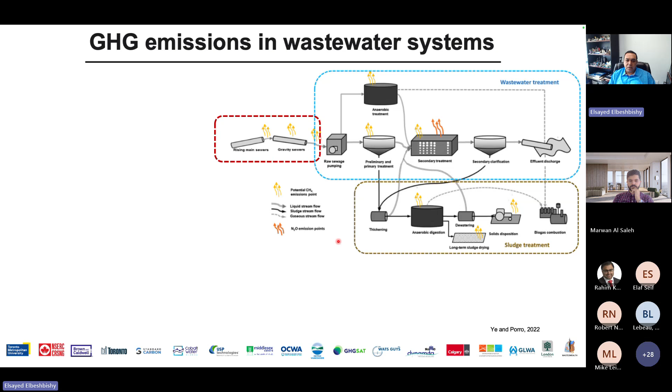In this project, we didn't focus on just one sector, but covered all of them, starting from the collection system. We are studying the greenhouse gas emissions from the collection system, from the mainstream wastewater treatment train, and from the sludge management part. So in general, we are focusing on the sewer network, wastewater treatment processes, and sludge management, and we are measuring both methane and nitrous oxide.

The main sources for methane emission, this is what we thought at the beginning when we initially put the research question together, were mainly the collection system, primary clarifiers, anaerobic digestion, and sludge storage. However, you're going to see today, based on our experience, there are some other sources that we didn't know about before. From this project we highlighted some of those methane emission sources that typically we don't consider.

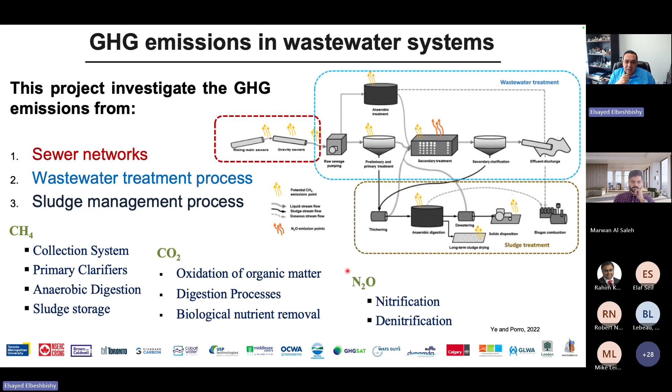Same thing for nitrous oxide. When we planned this project, we were focusing on wastewater treatment facilities implying nitrogen removal, with nitrification and denitrification processes, as the focus. We said, okay, what if we tested facilities that are not designed for nitrogen removal? What is going to happen? You will see some surprises today from this specific experience we had in this project.

So I will tell you what is the research question that we put at the beginning, and this is what we want to really understand at the end of this project. From the methane emission perspective, our target was to get to know what is the best sensing technique for methane emission measurements, because we have many sensing techniques or methods to monitor methane emission. So which one is better to use? Is it the ground sensing or the aerial sensing, or what?

And if we applied multiple sensors or different sensing methods—what we call multi-level, from the ground sensor to the aerial sensor, even using computer simulation—can we try to get a correlation between those sensing methods? That was another thing: can we use one to replace another? And what is the best method for detecting methane emission on wastewater, specifically on wastewater treatment plants?

And same thing, as you know, if we know the methane emission and we know the sources, we can mitigate that and we can reduce the emission. That's from the engineering perspective, I would say—sorry to say that, but I'd say it's the easy part.

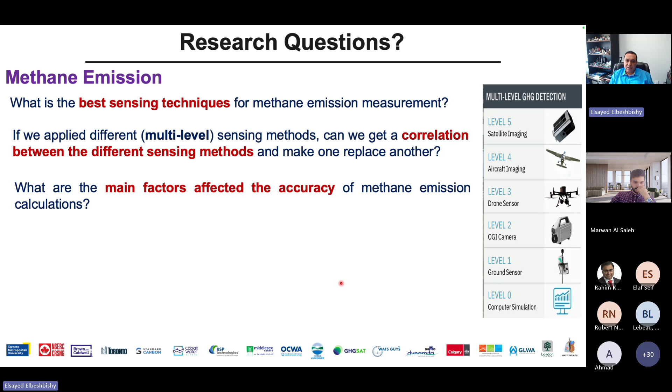So what are the main factors impacting that accuracy that we should really focus on? We were trying to estimate the plant-wide methane emission and compare it with what we call the theoretical methane calculation using the emission factor reported by the IPCC, and try to see how far the calculated theoretical value is versus the measured value on a couple of case studies on Canadian facilities.

And we want to get the strengths and weaknesses for each sensing technique, because this is one of the very critical things—to have a reliable and accurate number so you can put together a good strategy for mitigation.

And for the plant-wide model, there is some effort in the literature, and when we reviewed that, we found a lot of assumptions happen when you are calculating methane emission using the plant-wide model. So we said, let's see what the challenges are and how we can add a little improvement to that kind of plant-wide modeling for methane emission.

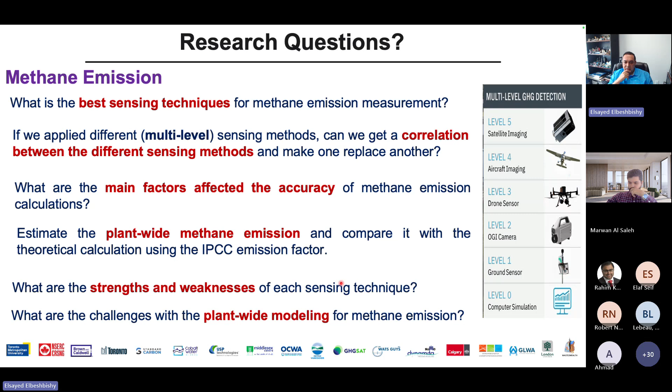And when it comes to nitrous oxide on the other side, we said, let's compare the methane emission and the nitrous oxide emission from non-nitrogen-removing facilities compared to nitrogen-removing facilities—if some facilities have BNR, or nitrogen removal, versus none. For the non-nitrogen-removing facilities, we call it unintentional nitrous oxide emission, or sometimes unoptimized nitrification.

And we want to also study what are the variables and factors impacting nitrous oxide emission. As you know, there are three pathways for nitrous oxide emission, so which pathway can happen during the operation of the facilities, and what parameters trigger one pathway versus the other.

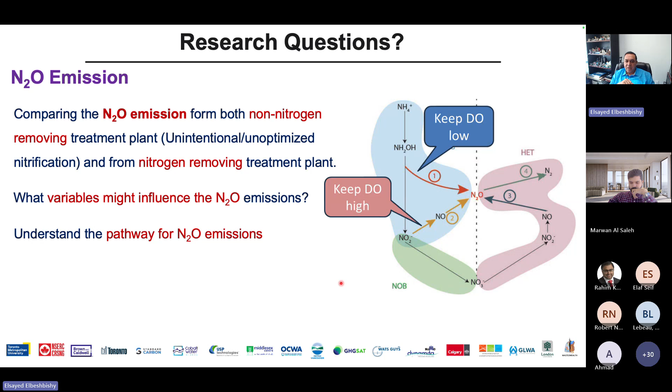And again, we are now in the era of AI and modeling, so we can't ignore that. So we developed a mechanistic and machine learning model for nitrous oxide, and ultimately our hope is to come up with a hybrid model for nitrous oxide emission, because there are a lot of parameters that many facilities are not measuring. So the idea here is to use the machine learning model, or what we call soft sensors, to predict some of those parameters that are not frequently measured at some facilities.

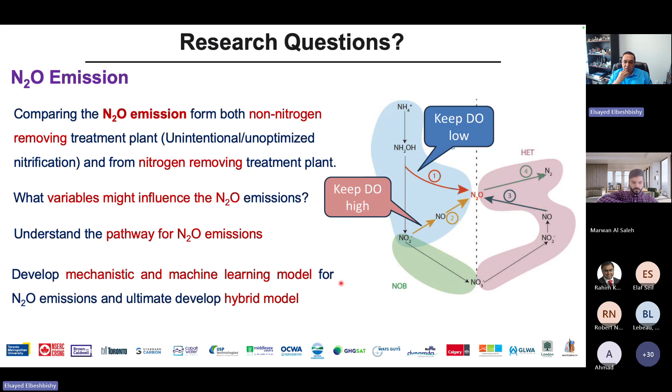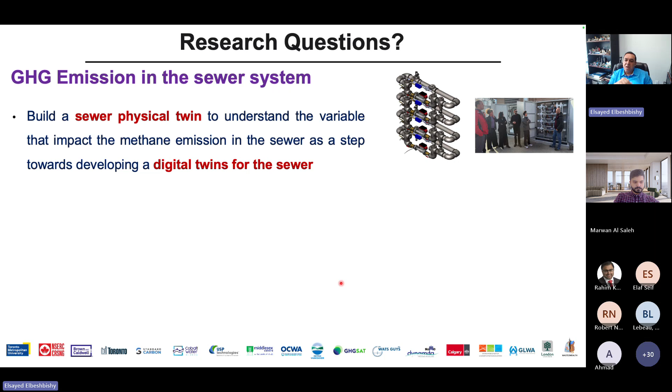And honestly, in this project we are so proud to have this type of work, where we said, let's monitor the greenhouse gas emission on the collection system. I would say this is the first of its kind—a sewer physical twin that we have in North America. And we are trying to understand what variables trigger methane emission in the collection system. This is one step toward developing a digital twin for the collection system.

And again, modeling is a big component of our project. We investigated both the mechanistic model and the data-driven model, and we combined them into a hybrid model and applied the modeling.

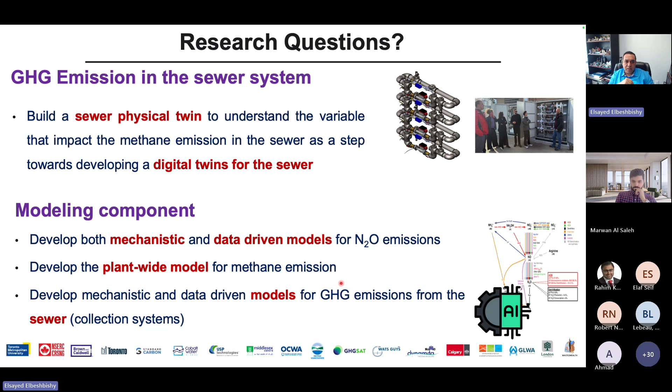And even that modeling is a big component. We can maybe arrange with Robert and Rahim to have a separate session about the modeling later on or early next year or so. So what is unique about this specific project that we are so proud to have?

This project is, first, the powerful collaboration that we have. As you see, we have 16 partners, including municipalities, industries, and research institutions, which shows the importance of the topic itself. Greenhouse gas emission is a very important topic nowadays, and we have many collaborators and partners with us in this specific project.

And that's why you can see that the team working on that project is very diverse, with a diversity of expertise starting from the collection system, the wastewater, the sludge management, the modeling, both mechanistic and artificial modeling, even remote sensing, and many other expertise. So that's a very powerful team working towards one goal: to better understand the greenhouse gas emission on or from the wastewater treatment plants.

So what I want to highlight is that we have three things that are first time to happen in a research domain. That is the first study to have what we call the multi-level detection of methane. Some research or work, even by industry, has already done maybe a couple of methods on detecting methane, but for this specific project, we have 4 levels in addition to the simulations.

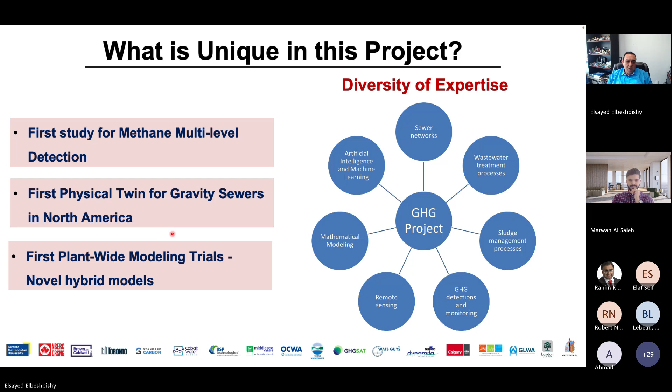We cannot ignore the power of social media. I'm a guy who really believes in social media, and we wanted to increase public awareness. That's why we created a lot of events and a lot of material to inform people about greenhouse gas emission. We even reached TikTok, Instagram, and we have a YouTube channel.

We generated some educational material in terms of videos and stuff. We visited community centers and schools to increase awareness about the topic itself.

So today we're just going to focus on one specific part of that project, which is a case study called the greenhouse gas emission monitoring campaign that has been done in one of the wastewater treatment facilities here in Canada. And I'm going to leave the floor now to Dr. Ahmed Elsayed to give us insight through the methane sensing and quantification in wastewater treatment plants. So now I'll leave the floor to you, Ahmed.

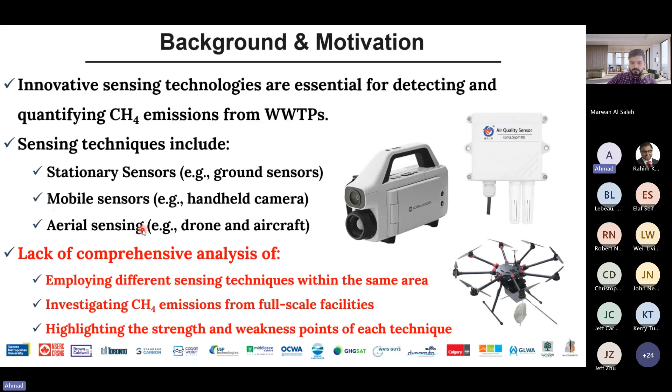And it's the most important point as well, highlighting the strengths and weakness points of each sensing approach and how to complement everything together.

So the main objective of this quick presentation is to walk you through the application of multi-level sensing technologies within a full-scale treatment facility, and isolate the potential sources of emissions and quantify the plant-wide greenhouse gas emissions from the entire facility.

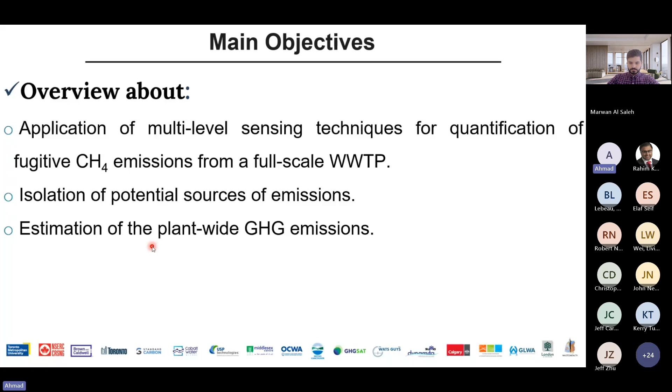So quickly for the site description, we have a Canadian municipal wastewater treatment facility with a typical configuration of wastewater treatment facilities, with secondary treatment and primary treatment, beside anaerobic digestion systems and waste gas burners. The most interesting point within this facility is they have high organic loading rates and content, which can be highly reflective on the greenhouse gas emissions, especially the methane.

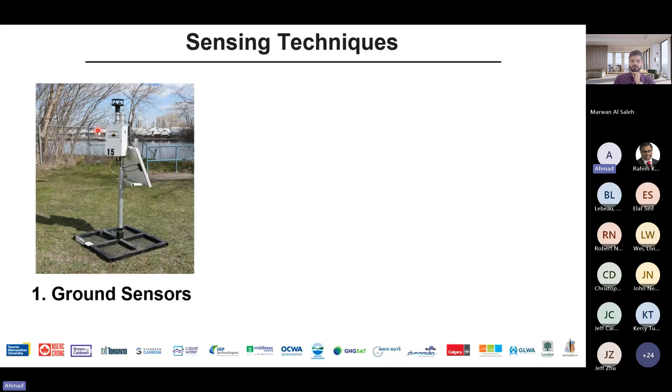For the sensing techniques in this study, we have three sensing approaches. The first one is the ground sensors, and we call it the SOOFIE sensor. Second one is drone sensors, and third one is the handheld OGI camera.

So for the ground sensor, we have a set of 4 months continuous monitoring, based on a 15 minute interval. And for the drone sensor and handheld camera, we have a snapshot from an intensive 3-day on-site campaign.

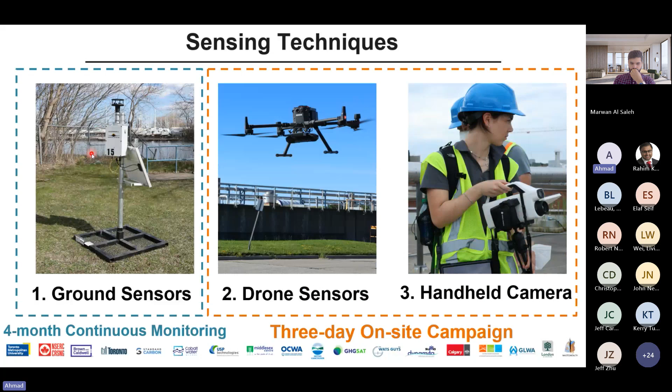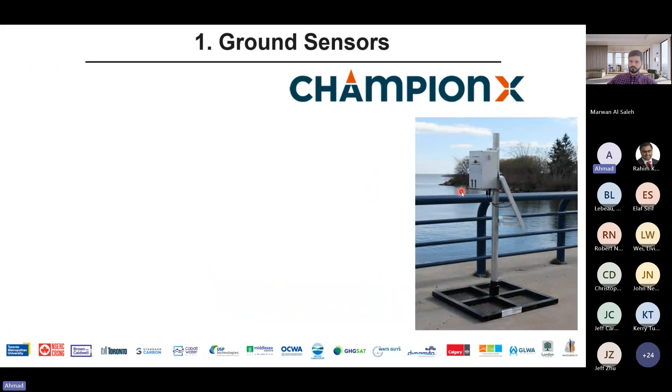Starting with the ground sensors, we have right here the SOOFIE sensors. The typical formation of this one is a metal base and metal post, mounted with a solar panel beside the box right here, which includes the main components of the sensor. This one was provided by ChampionX.

Inside this box, you can find a battery, which can work lasting for 12 hours, a charge controller, and the most important part, which is the MOS, or metal oxide semiconductor sensor, that measures the temperature and the methane concentration, and this fan to grab a sample of air for analysis.

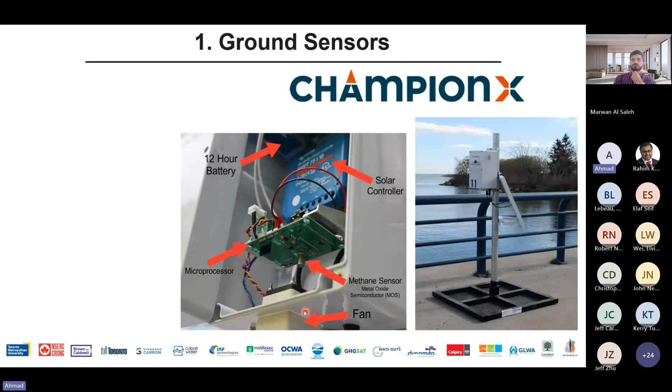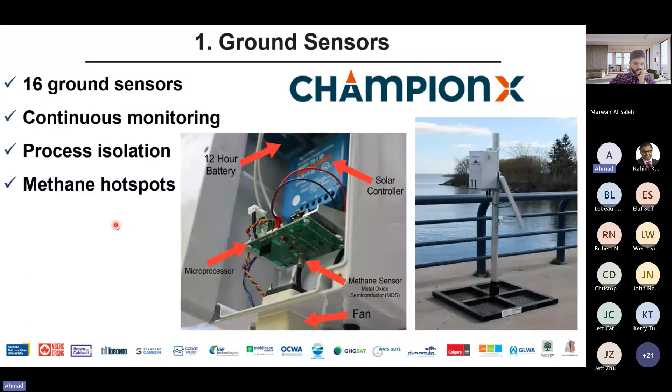So in total, we have 16 ground sensors distributed over the facility, and as I mentioned, 4 months of continuous data. The main objective was to do process isolation and identify the methane hotspots.

The second platform or technique is the drone sensors. We have 2 different sensors mounted on the drone. The first one is called the OPLS sensor, Open Path Laser Spectrometer, that can be used for quantification of the emissions in terms of flux or the plume itself.

And the second one is a detection sensor, just to tell us whether there is fugitive methane at this area or not, using the halo OGI camera. Both of them are also provided by Champion X.

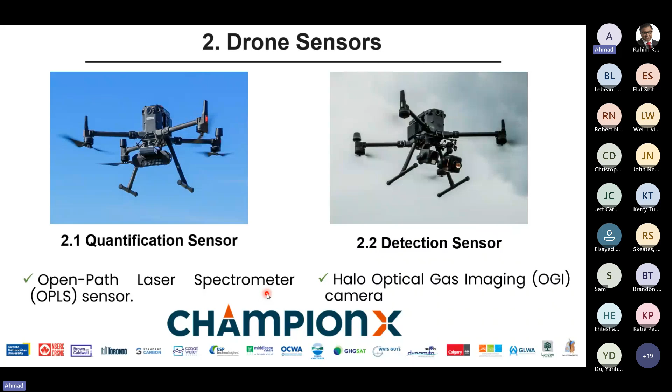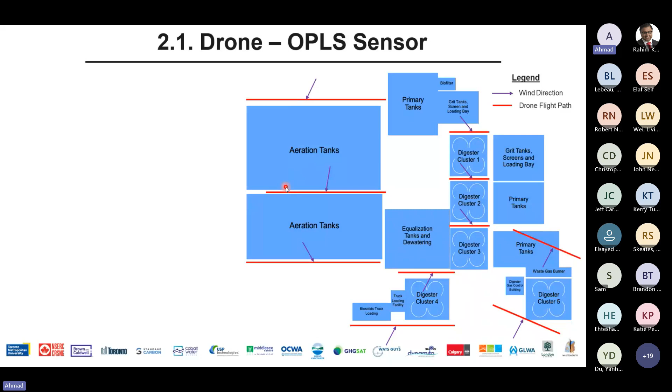So for the drone OPLS, it meets on a certain concept called the wind curtains. So for example, if we wanted to isolate this group of aeration tanks, we have to fly downwind and upwind of the process itself, and from there we can subtract the difference between the two emissions.

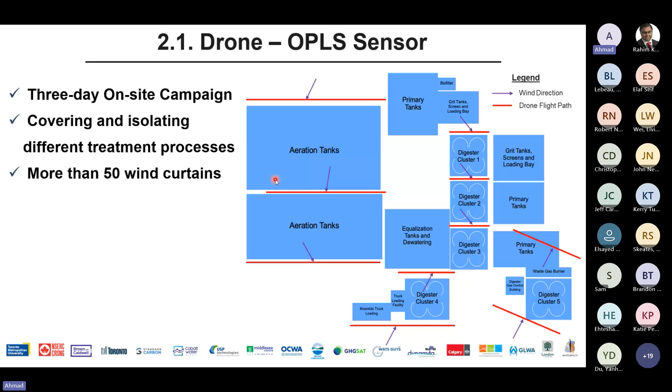And from there we can identify how much was emitted from this process. So we did more than 50 wind curtains along the facility, trying to isolate each group of units, and from there we can determine the emission rate from each one.

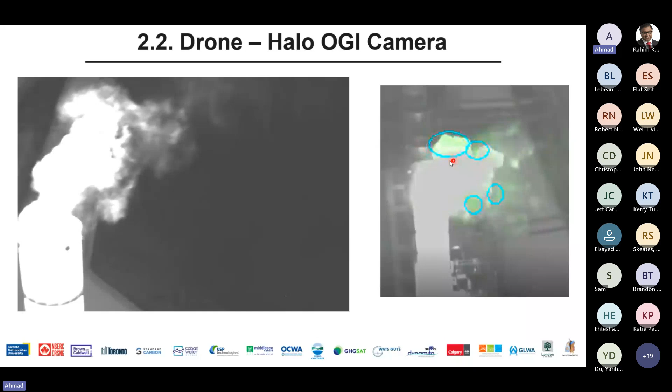There is an example for the halo OGI camera, the second detection sensor that was mounted on the drone. The green lines right here, or the green bloom, show the methane, and from here we can see the emissions coming out from the waste gas burner, including the thermal and steam aspects as well.

I don't know what is, oops, why it's not working. Let me...

So let's jump to the process isolation, and for the sake of time, I'm going to show just two processes: the anaerobic digesters and the aeration tanks.

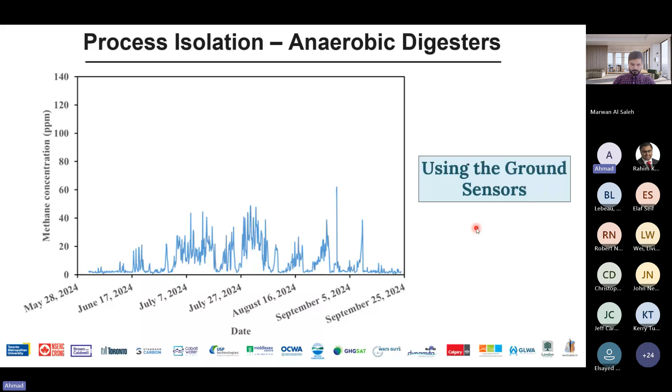For the anaerobic digesters, we can see a time series for 4 months for the concentration of methane in ppm, using the ground sensor around the anaerobic digesters, and we can see that the average is 8.9 ppm, with some spikes at 45, 50, up to 60 ppm.

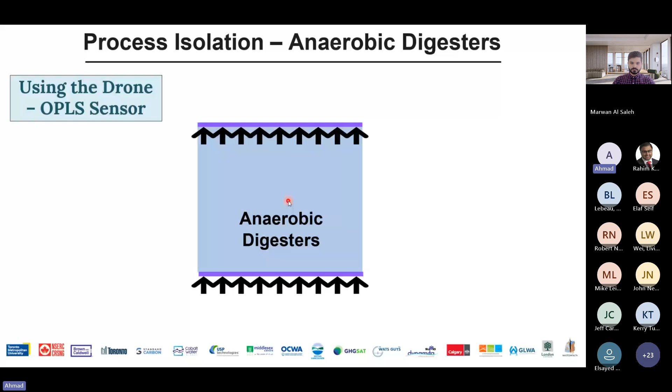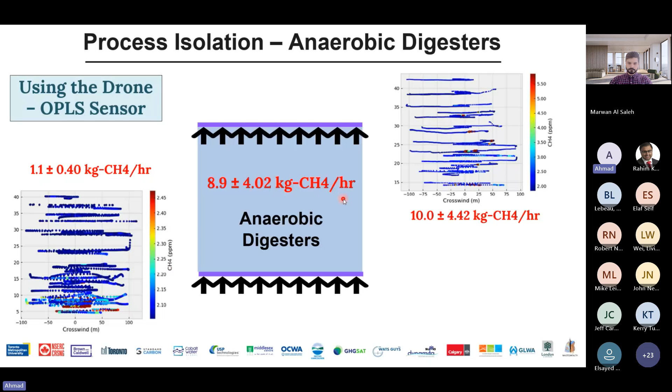For the drone using the OPLS sensors, let's look at the anaerobic digesters. The upwind methane emissions were around 1.1 kilogram per hour, and downwind was around 10 kilogram per hour. When we subtract the upwind from the downwind, we find that the anaerobic digesters are emitting around 9 kilogram per hour in terms of methane.

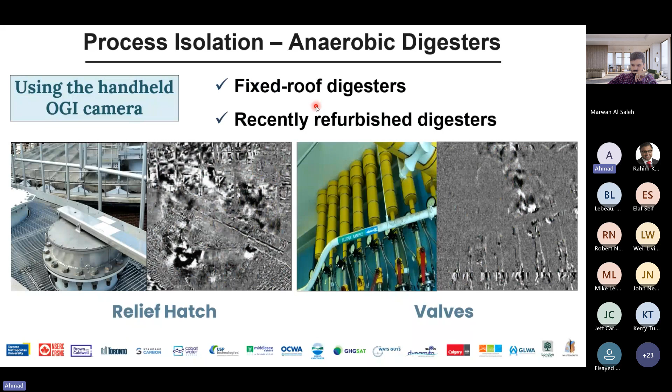Using the handheld OGI camera, we can see some fugitive methane from the relief hatches and valves, as you can see right here, the small plumes. In general, although we have some emissions, they are not super high because they have fixed roof digesters and they always refurbish the digesters on a scheduled maintenance process.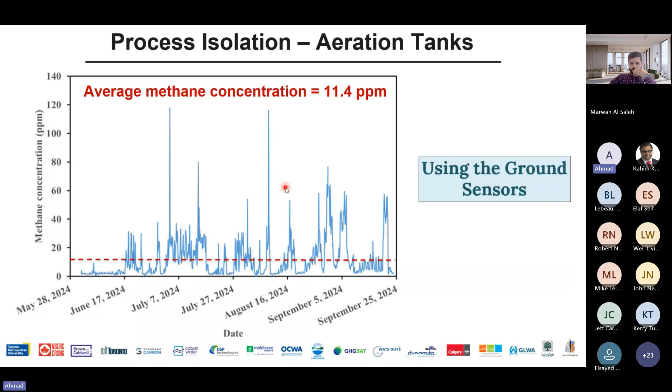Second process is the aeration tank, and compared to the anaerobic digesters, we have 11.4 versus 8.9 for the digesters. We have a lot of spikes for methane concentration up to 120, almost double the spikes allocated within the anaerobic digesters, indicating that aeration tanks are emitting a lot compared to anaerobic digesters. From the OGI camera, we can see the plume coming out from the open hatches within the aeration tanks. Our justification for such high emissions is probably due to coarse aeration, low dissolved oxygen concentrations, and poor mixing conditions within the aeration tanks.

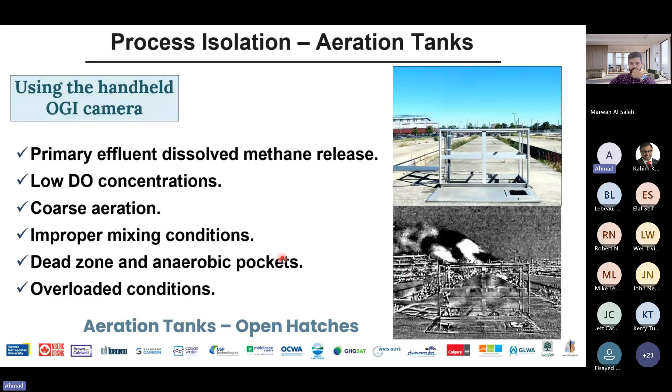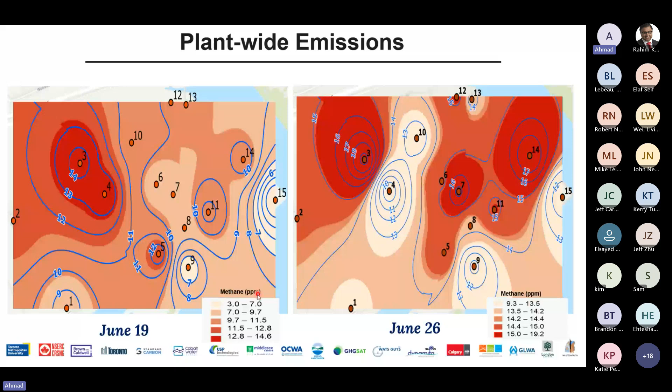Before we jump to plant-wide emissions, let's look at two heat maps for 19th of June and 26th of June. Here we can see the distribution of methane concentration in ppm using the ground sensor. Ground sensor number 3, 4, and 5 had the highest emission, between 12 to 15 ppm. But just one week after, we found sensors 3, 7, 11, 14 had high emissions up to 19.2. Even the low concentrations, which ranged from 9.3 to 13.5, were ranging from 3 to 7. That means we have methane everywhere, and we have alternation between processes emitting according to the operational conditions and schemes.

If we wanted to fractionize total emissions, we find around 40% of emissions coming from the aeration tanks, followed by primary treatment at 22%, waste gas burner, and surprisingly, the dewatering system and anaerobic digesters contributing around 7% of the total emissions.

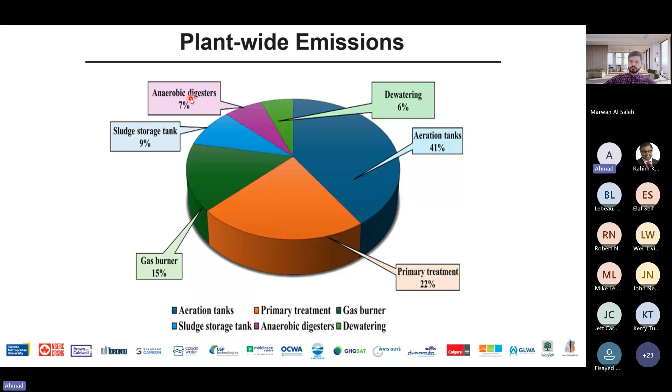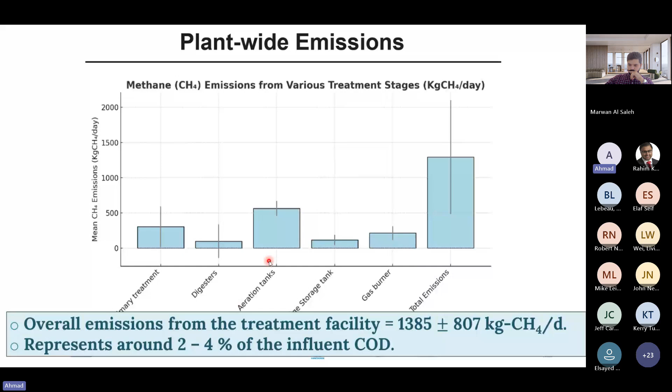If we transfer these values into numbers, the total emissions are around 1,400 kilograms per day, representing between 2 to 4% of the influent COD. So although we have high concentrations in aeration tanks and primary treatment, at the end it's representing around 2 to 4% of the influent COD, which is very comparable with values in literature that reach up to 6 and 7% of the influent COD. So although we have some emissions, it's still within the reported limits.

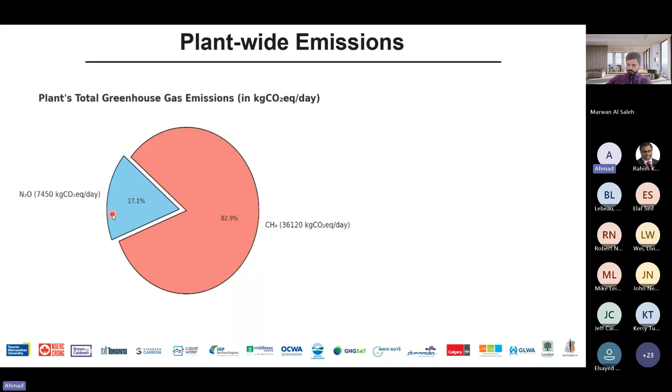Finally, if we compare methane emissions with nitrous oxide emissions, which Marwan will be talking about in a few minutes, we find that methane has almost 83% contribution to total greenhouse gas emissions compared to 17% for nitrous oxide, which is not really common. People always think nitrous oxide is more dominant in wastewater treatment facilities, but according to this study, it highly depends on the operational conditions, influent characteristics of the facility, and compliance elements for each facility.

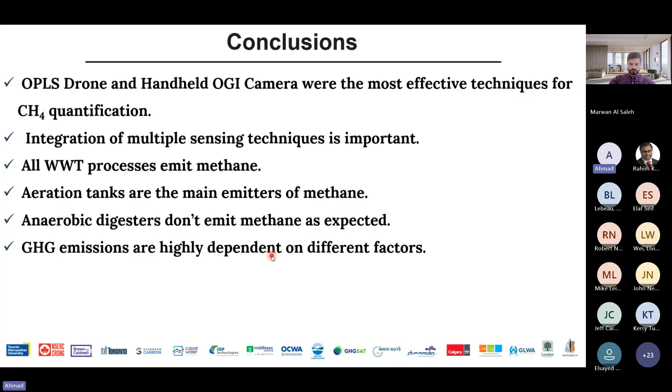In conclusion, we assessed the performance of different sensing techniques and found that OPLS, drone, and handheld camera were the most effective for reasonable quantification of methane. It's very important to integrate multiple sensing approaches. From a wastewater treatment perspective, all processes are emitting methane, especially the aeration tank and primary treatment. On the other hand, surprisingly, the anaerobic digesters didn't emit a lot in this study, which means greenhouse gas emissions are highly dependent on different factors, especially when methane contribution is much higher compared to nitrous oxide. So I hope I stuck to the 10 minute limit.

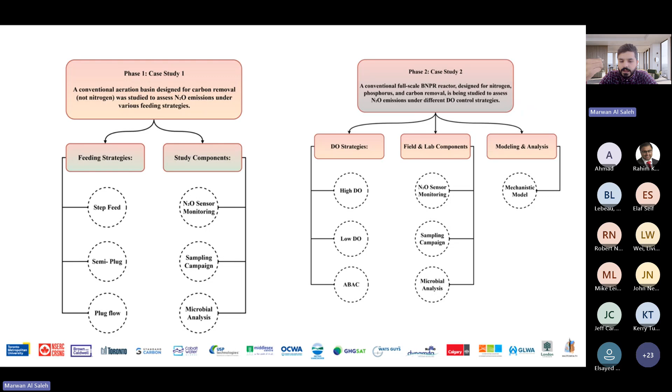This means how we are controlling the air that goes into the tank, because the main step in the nitrogen cycle is transforming NH3, ammonia, into other species, and that's how the cycle begins. All of this depends on the nitrification pathway. So we tried three different things: a high fixed DO, then we lowered that high fixed DO a bit, and then we tried ABAC, which is ammonia-based aeration control.

We included 2 sensors: one at cell 4 to detect any emissions produced through the anoxic zone, which is denitrification, and one at cell 7 to see if there are any emissions from nitrification. The location of these 2 sensors was based on 2 things. First, the historical data - we already have data for the plant for 2-3 years, and we analyzed it, concluding that the highest nitrification removal, or ammonia removal, happens between cell 5 and cell 7. I will show you these results later.

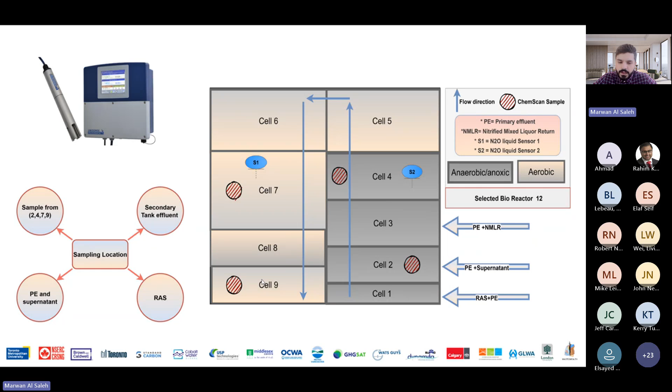So just one thing to mention, we have 3 gates for this specific tank. We have gate 1 at the beginning of cell 1, gate 2 at the beginning of cell 2, and gate 3 at the beginning of cell 3. And one thing to note is we have a nitrified mixed liquor all the way from cell 9 to cell 3 for denitrification purposes.

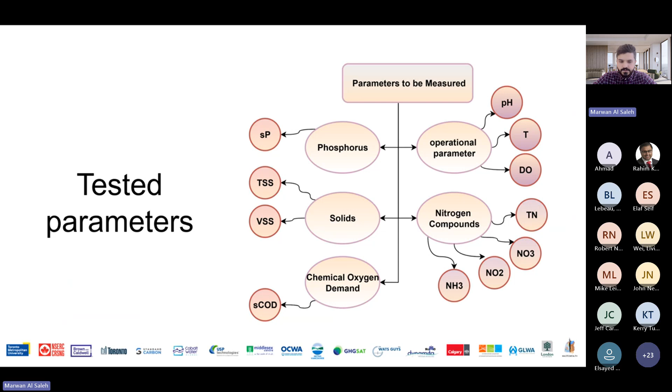So we took a grab sample, as I mentioned, and we test for pH, temperature, DO, total nitrogen, NO3, NO2, and NH3. Also we did soluble phosphorus, TSS, VSS, and soluble COD as well.

So basically at cell 5, because this is the beginning of aeration phase, the average was 2.7 milligram per liter as DO, and at the end of cell 9, it was like 1.2. When we move to ABAC, and by the way, normal high fixed DO means it's fixed DO, so basically they don't change the aeration. They fix the aeration regardless of how much ammonia they have or how much flow they have. So they try to fix the DO levels regardless you have ammonia or you don't have ammonia.

For ABAC, I would say it's a smart option where you basically aerate based on the ammonia levels you have. So they have an ammonia sensor at the beginning of the tank, and an ammonia sensor at the end of the tank, and they do feed forward and feedback control based on the sensor. So whenever you have high ammonia in the beginning, like high concentration and high flow, you basically have a high ammonia loading rate as a mass. That's where they increase the aeration to have more DO available for the bugs, basically the microorganisms, to do the full nitrification cycle.

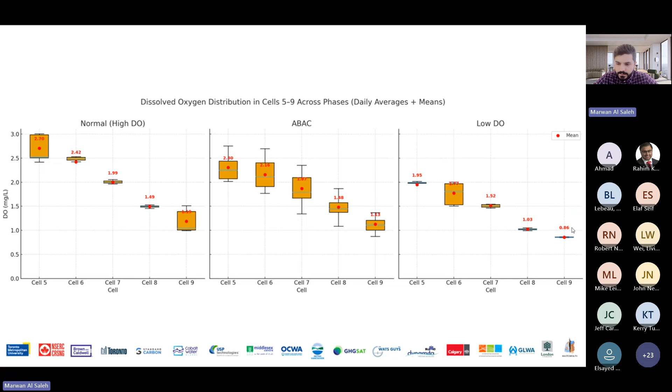So when we moved to ABAC, the average was 2.3, so we had a cut of 0.4 mainly in cell 5. And when we moved to cell 9, it was almost the same, but on average we had a cut like between 0.05 to 0.1. And when we moved to low fixed DO, we tried to fix the DO at lower values. So instead of 2.7, we tried 2 at the beginning of cell 5, and instead of 1.2 at cell 9, we tried 0.8 at cell 9. Let's see how this affected the results.

So first thing, the ammonia removal of the system, and this is based on cell 4 as our reference. So basically at cell 7 in the normal operation, almost 80% of the ammonia was removed. So almost 80%, which is the majority of ammonia, was removed between cell 5 to cell 7, as I mentioned previously.

Same thing was happening in the ABAC. So basically we did cut the aeration, but nothing happened to the removal efficiency. It did not affect the removal efficiency even though we decreased the DO and decreased the aeration as well. So at the end of the secondary effluent, almost 98% was removed in the normal, and almost 97% was removed at the ABAC. While if we compare this to the lower DO we tried, the removal efficiency decreased by almost 30% at cell 7.

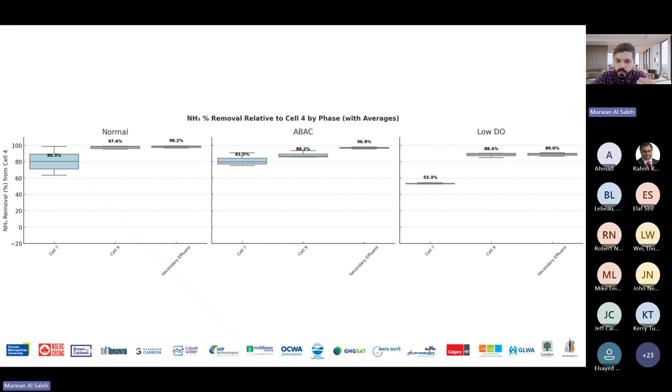So instead of having 80% of the ammonia removed, we had 53%. And at the end, it was like almost 90%. So there's a decrease of almost 7 to 9% in ammonia removal overall.

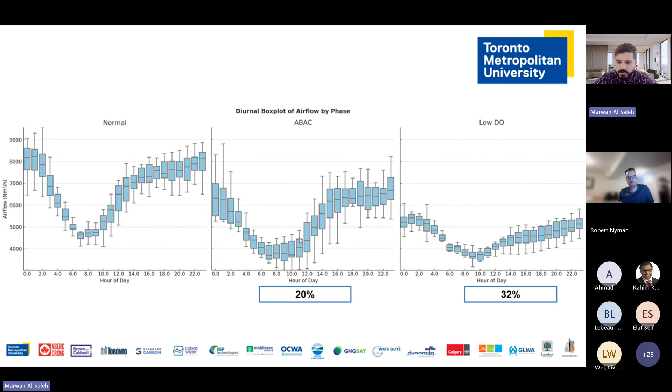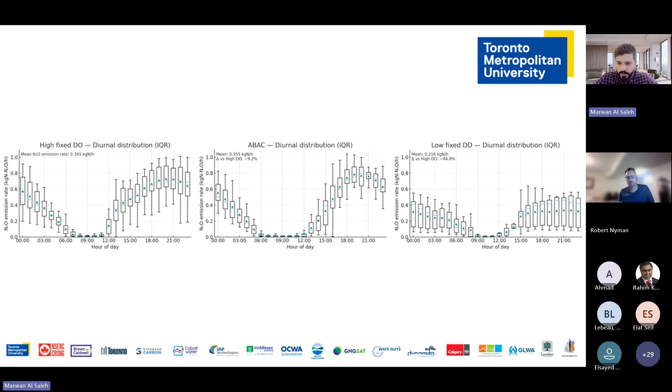If we compare this to the airflow rate, which was cut by 20% when we moved from normal to ABAC, and was cut by 32% when we moved from normal to low DO. And if we try to convert these, the raw data with the airflow rate, into the N2O emissions calculated to be emitted into the atmosphere, we noticed the average mass flow rate for the high DO was 0.39, and for ABAC was 0.35, which is almost a 10% reduction. And we noticed it's 0.216 kilogram as N2O per hour for low DO, which is almost a 44% reduction.

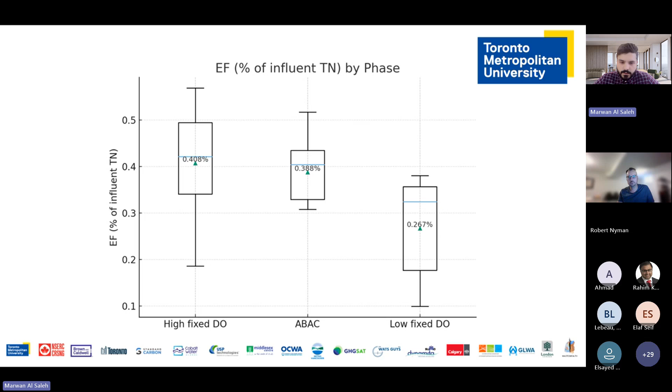This is the emission factor for the 3 phases. It's still lower than the IPCC emission factor, but the fact is that when we moved from high DO to ABAC, the emission factor was reduced, and the nitrous oxide was reduced as well. The airflow was reduced, so we basically saved energy, and the performance of the ammonia removal was the same. So we did not lose any performance in the system - it's still performing at very high removal efficiency.

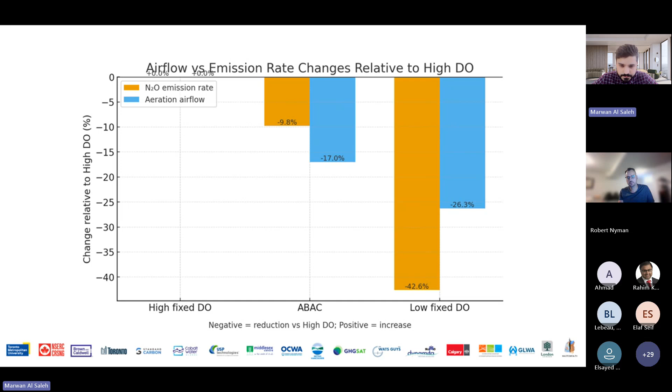So at the end, since time is finished, if we need to compare these three, we have a trade-off between the performance of the system, the emissions, and the energy saving. Comparing these three together, I would say the best was ABAC. We reduced the emissions by 10%, we reduced the airflow rate by 17%, and we kept the same ammonia removal during the system. I don't have time to share phase one, but if you have any questions, I can do it at the end. Thank you.